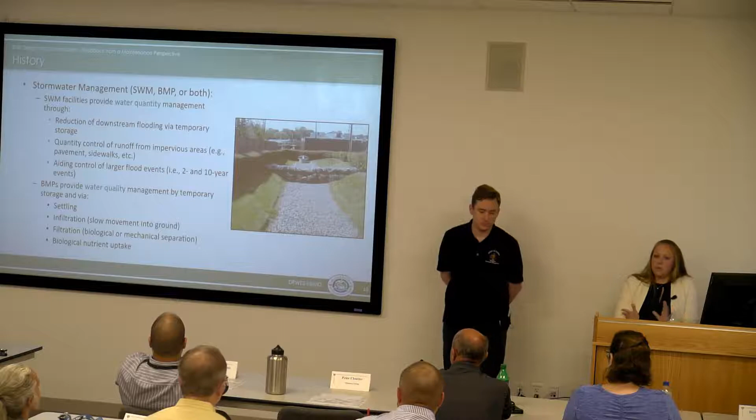And BMPs, obviously, that's the main driver of a lot of designs these days. And part of it has to do with the Chesapeake Bay TMDL. Some of it has to do with local TMDLs. But it's certainly what we see as the primary inventory additions here lately.

But we have dry ponds that are being retrofitted into enhanced facilities. So they're taking peak shavers and they're slapping a BMP plate on it. They're adding some maintenance features to it and calling that an enhanced pond.

And then, as I said, we at Maintenance and Stormwater manage the collection, conveyance, and management aspects of the storm drainage network. So the top photo is the collection point, and then the conveyance is the channels and open channels and pipes. That is a section of maintenance that is performed by another branch within our group, and so we do not, from our floor, maintain any of those types of structures.

That's all done by our infrastructure branch within maintenance, and Malik actually used to work there. We are strictly management, so we only handle facilities.

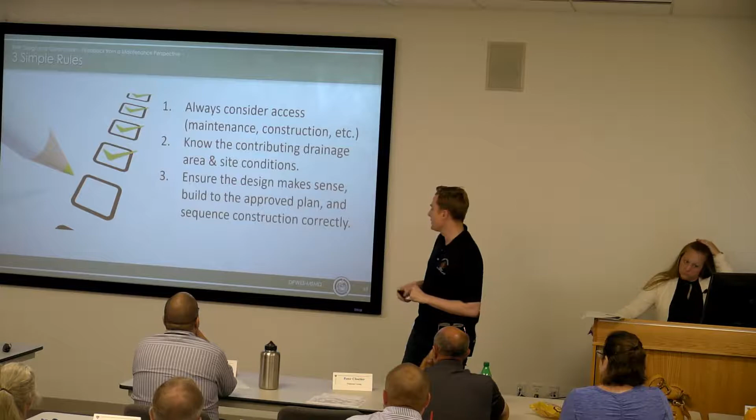And 3, ensure the design makes sense. Easier said than done, I know. Build to the approved plan and sequence construction correctly. So you all are really good. You hit on this. Follow best practice when you're designing this stuff and when you're building it. Make sure you're building as designed.

And if you're not sure if the design is correct or is going to function correctly, don't be afraid of getting third-party reviews. Even consider sending it to a maintenance crew, especially if you're in Fairfax County and you've got a plan set that you're trying to push through. Let the stormwater maintenance crew take a look at it, and we'll chop it up and dice it up and throw it back to you. Then you have to start all over. I'm just playing. So do your due diligence. Make sure that when you're designing the stuff and building it, that you're building it to spec.

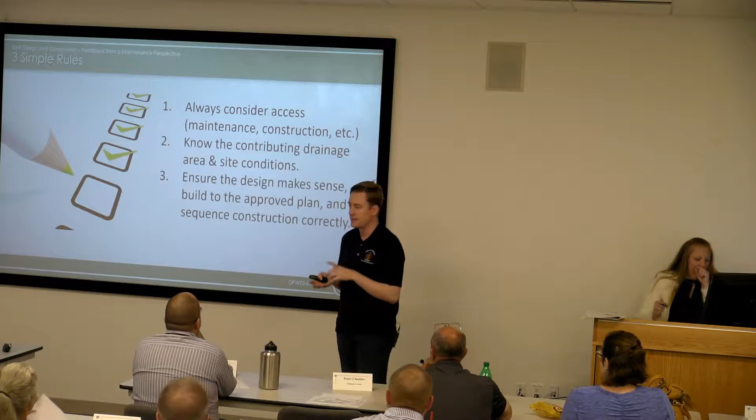No surprises here. I know a lot of you all could teach this class, and you'd probably come up with these same conclusions. Just 3 simple takeaways. Try and keep them in mind at all times when you're doing this stuff, and we'll hit on this slide again just so we don't forget. So the rest of the presentation is going to focus on a few of those facilities we talked about, the specific maintenance requirements, things to keep in mind beyond or in addition to these 3.

And then we're going to go on like a little shop of horrors, or airing our dirty laundry, if you will, about some facilities in Fairfax County that had persistent maintenance issues that might have been resolved by following one of these 3 rules. Again, if you're a Fairfax County manager or you're in the private industry and you were part of these projects, I'm not here to rag on you. I'm just using these examples to let you keep them in mind moving forward, because each one of these BMPs is an opportunity to learn.

So common facility types. Let's hit the types first that we're going to focus on, and then we'll go through the specific dirty laundry, if you will. So the first one that we'll talk about, and we'll get into a case study, is the cistern. These are not widely applied in the county. We are starting to see them more. As John mentioned, we were just in Milwaukee for the Green Infrastructure Leadership Exchange, and Milwaukee is covered in cisterns. It was quite remarkable considering the weather.

But these are the various types that you might see in the county. Rain barrels are the ones that come to mind, but they're typically not sized accordingly. But you've got gravity feed, you've got pump systems, and then the one in the middle is the one that we'll talk about a little bit later in our case studies, which is the George Marshall High School cistern.

But the basic function of these is that they collect typically your rooftop drainage. They can also collect some concentrated flow, but it's typically from the roofs, and you want to just reuse it on the property. And so the one we'll talk about today has an advanced filtration system. So I think it's called a VS5000, something really fancy.

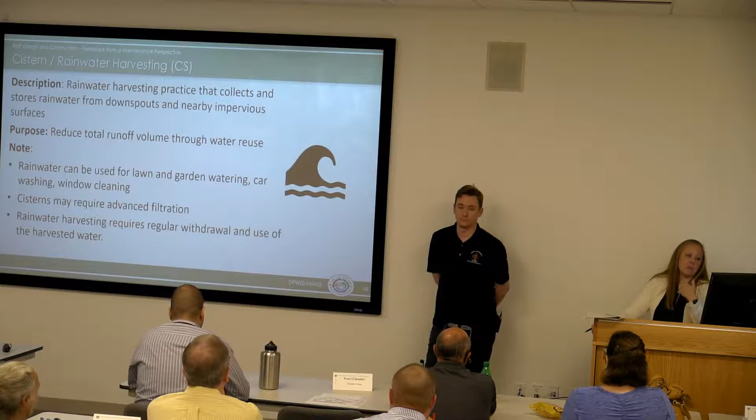And in order for these things to actually work, they actually have to be used. And so the biggest problem we see when we visit these sites is that they're full, always. And there's no irrigation plan, there's no plan to actually draw out the water and make room for new storms. And so, kind of defeats the purpose.

A question regarding the filtering. Is this rainwater that's being filtered? Yeah. For use in watering a lawn? Irrigating a ball field. Why? If it's just falling from the sky, what are you cleaning? Because it'd just be falling on the field anyhow. I think the thought was of bacteria.

Trust me, this thing is still not operational, and I think it came online in 2012. But yeah, that's a good question. So we scratched our heads as well. So there's a pre-treatment upstream. There's a vortex hydrodynamic separator. We'll get into it, but yeah. I mean, I guess I can get it if it's hydrocarbons, collecting runoff from a parking lot or something like that, I could see it make a difference, but yeah.

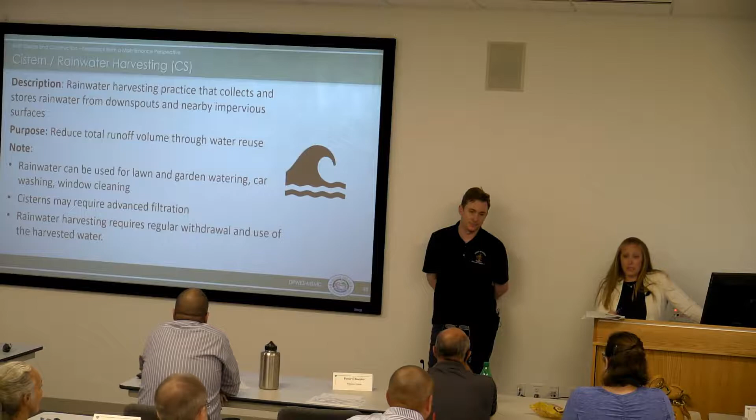Hopefully folks aren't just randomly asking for these things. Yeah. Stormwater planning is not in the group. Okay. You said that was a health department request. According to the folks over in planning, that was a request made by the health department. So that probably doesn't get applied to all facilities, just ones for a public facility like that on a school ground. Potentially. I think it did have a lot to do with the location of the facility, it being with children, but I don't know the details on why. Okay. We just live with it.

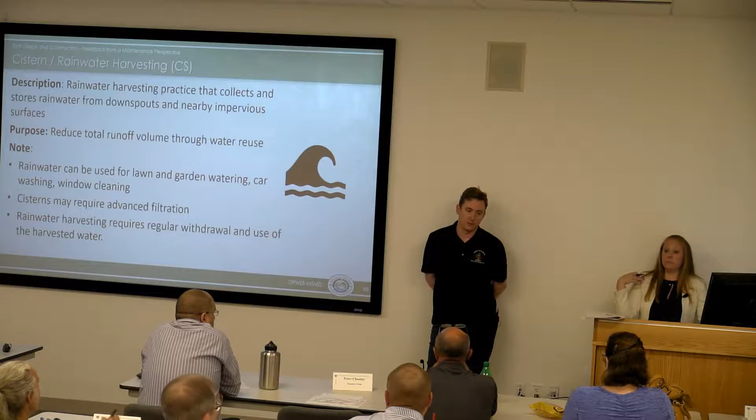So that's a good question to ask yourself when you're designing, like why? Yeah. Sounds expensive. They're thinking kids are gonna be drinking the hose water. I don't even know the half of the expense.

It also has to do with how it's re-irrigated, recirculated. If it's through percolation underground, then it's not as much of a concern. But like Carly said, the bacteria, if it sprays, they're making it airborne. So that's one of the reasons they wouldn't want it to be filled with all sorts of biological stuff.

All right. So again, we're the maintenance workers. So sometimes we're not consulted on design, if you can imagine that. A lot of times, most of the time. And if anyone has sent me a design recently and I was consulted on it, you probably saw me scratch off the installation of these types of facilities. So sorry if that's the case.

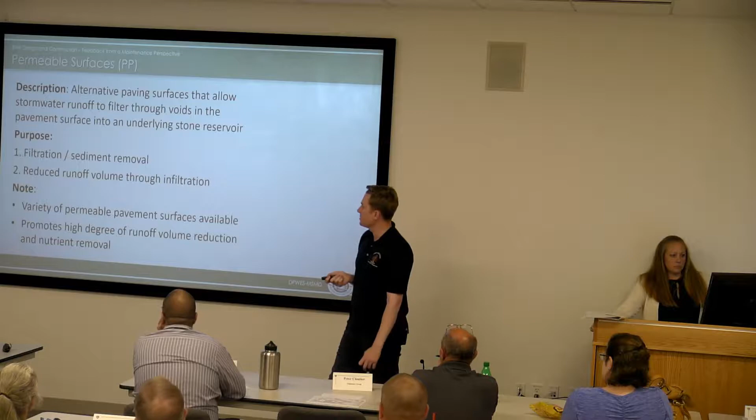And so we have one particular site that is in the travel way where the children are going to get on and off of a bus. And so you think they're going to heavily salt those, heavily plow that, and then you have constant loading over and over and over. So keeping those things in mind is crucial. But this is a really good example of a good site location. I just wanted to throw that out there. Yep. Fire lanes or something, like a fire lane.

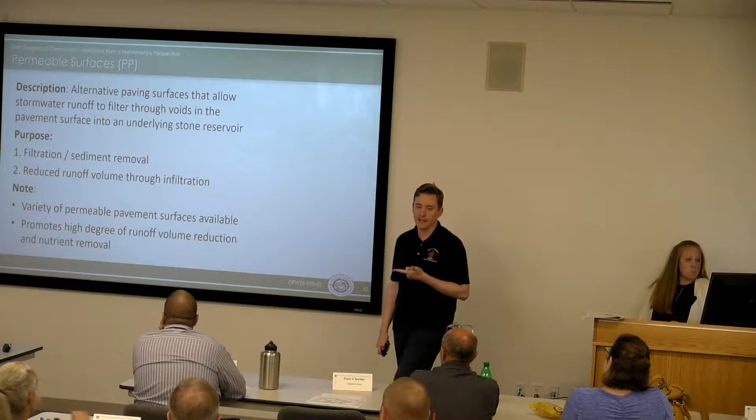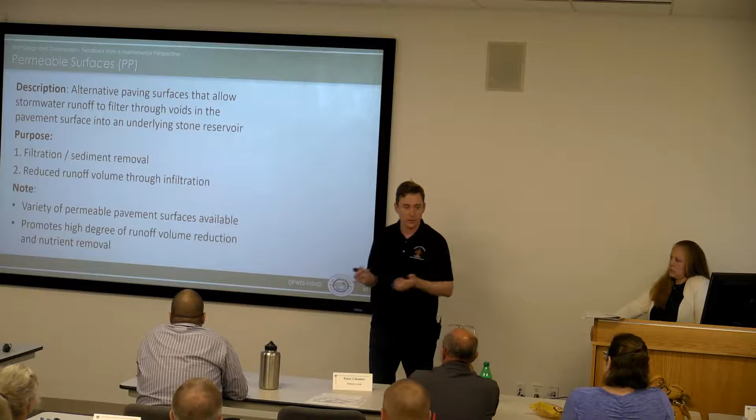Yeah, something that, if it kind of didn't get plowed, it might be okay. Yep, absolutely. So we talked about our three things: access and design are two big ones for this, because you can install these as intended in places that have been spec'd before, or where they've been installed before. But what we're finding overall is, if they're not designed correctly, if the concrete or asphalt isn't cured correctly or at the right temperature, all it takes is a small variation to cause failure.

And as part of dealing with these facilities from a maintenance perspective, we have often sought help from other agencies to do studies on them to figure out what's going wrong with these facilities, what the main maintenance issues are, because at any given time we may be sending out maintenance workers to handle 100 of these facilities, and if the majority of them are failing, we want to know why.

So that's how many we have in the county, but we did involve Northern Virginia Soil and Water Conservation District in a study recently of permeable surfaces. We sent them to 60 of our facilities. We have 100 now; 60 is how many there were at the time, so you can see how quickly we're gaining these facilities. And they assessed them for functionality and proper design, construction, what have you. And the findings were not good.

Their basic conclusion was that these are not a low maintenance BMP, that they are expensive and they are finicky. They're often cited as a simple solution to install, but let me tell you, from a maintenance perspective, that is not true. At least not in this area. Maybe in coastal areas, areas that don't have snow, that might be the case, but that is not what we found in this area. It's not what was found in Philadelphia, and they're studying it now in New York. I suspect that might be the case as well.

The main issue that Northern Virginia Soil and Water Conservation District, it's a mouthful, found was that there was not an established infiltration rate. So these things were designed, but no initial testing of the baseline infiltration rate occurred. So some of them could have failed immediately after design. That's something that needs to be incorporated into this process. Think about, are these things actually functioning? Before you walk away from a facility, make sure what you've put in the ground actually works.

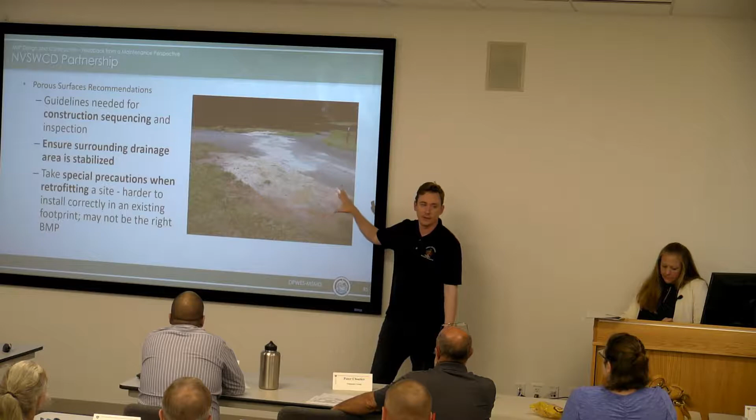So as a result, and based on the findings of the study, we're doing more routine infiltration testing, at least once a year, twice this year, and more frequent maintenance to try and determine, for these facilities that have clogged, if we can turn them around. So the recommendations from the study, we hit on this with the public safety headquarters: sequencing is crucial, making sure there's no run-on occurring that's going to clog those pore spaces. You want to time these things at the end of construction and avoid any heavy construction equipment driving on these or any debris stockpiling on site.

Yes? So I imagine Arlington's having the same issues. Have you guys communicated with them about how they deal with it? I've communicated with Arlington about the issues that we're facing, and keeping an open line of communication about our findings. I deal primarily with the residential infills. Oh, right. So we give no credit for porous surfaces. You can build it, you get no credit. But I've heard that it's widely promoted in Arlington as a solution for residential infills. Yeah, based on what I've seen with our public facilities, maintenance is expensive and frequently needed. So I'll leave it at that. I can't speak for Arlington or what they've experienced.

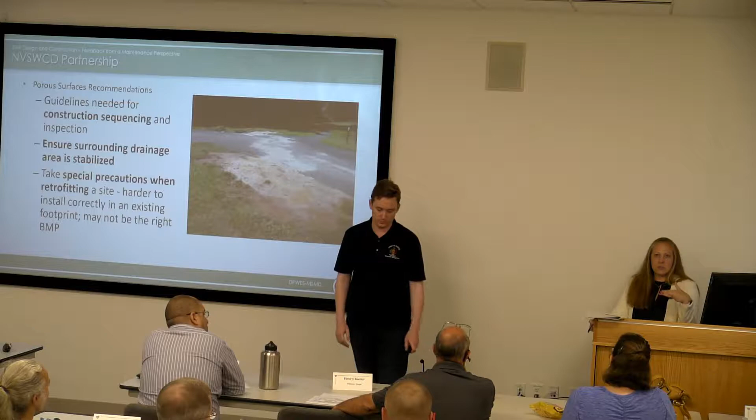So just real quick, we do not allow porous surfaces on residential properties to be input into a long-term BMP. What we're finding, especially under an INF plan type, is that subdivision plans are sneaking in that have maybe 4 homes on it, and they're putting any type of facility they want on those plans. So we just got one, what are those little driveways? Pipe stem, yes, it was a pipe stem type development, and each of the driveways off the pipe stem were porous asphalt.

And we try with infills especially to go out and inspect those within 1 year of the bond release so that we don't have too much turnover with the property owner and they don't complain that we waited 5 years to visit them for the first time. So we try to get to them really quickly. And the very first inspection within 1 year of bond release, they did their 5-gallon bucket test and it just rolled right off. So they all got their driveway sealed. Yeah, they've already gotten their driveway sealed. So that is a tremendous impact. And they have no idea what they've done. No clue.

So we're working through that, but it's just not a good idea. You've got to think about the person on the other end and in perpetuity. That means forever. That's a gigantic expense this whole community, parcel by parcel, is going to have to fix. So you've got your plan approved with that device, and now what? You have to go back and do something. They're going to have to reinstall it, or go back to land development and go through the whole plan process all over again. Once bond's released, there's no revision. Yeah, it's not ideal. But it's currently approved on a bonded subdivision. No, I think it reduces the C factor. They don't allow it for, well, no, do they? They do, but I think it's.

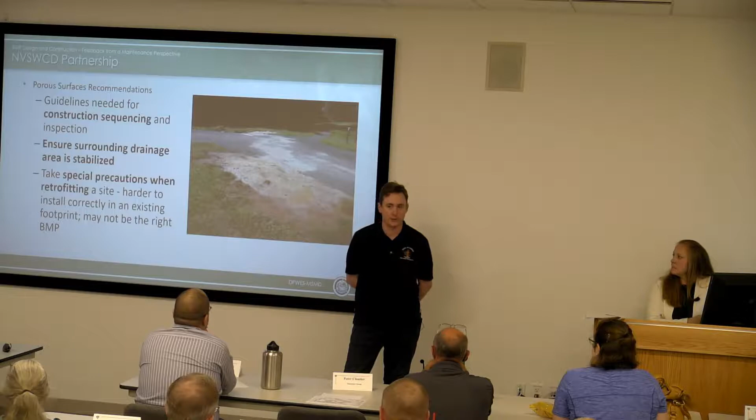And even with all the maintenance that we're doing on them, a lot of them we still can't restore appropriate infiltration. So I can't imagine what a homeowner would be doing who might see it as a passive facility that doesn't need routine maintenance. So we're going to keep going, but these are all good points. Feel free as we keep going through to shout out and give us pointers too, because it's supposed to be a two-way conversation here.

Some other findings from the study, and again, we touched on this before: sequencing is crucial in construction because you'll have run-on. And if you're retrofitting a site, installing these is not always as easy as slapping down new concrete or new asphalt. If you use the prefabricated stuff, getting the sub-base just right so it's level is very tricky. It's been tough.

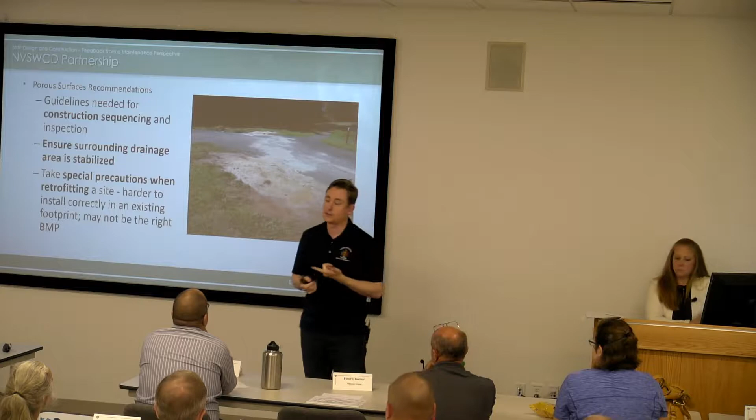A lot of times if you think you can just go in and re-pour asphalt or concrete, it may not be the right solution, because that window of properly spec'd asphalt and concrete is very narrow when you consider that it has to be cured correctly, the weather has to be right, you have to make sure your construction group is not compacting the sub-base, all that stuff. For all these reasons, we're very hesitant about moving forward with this type of facility.

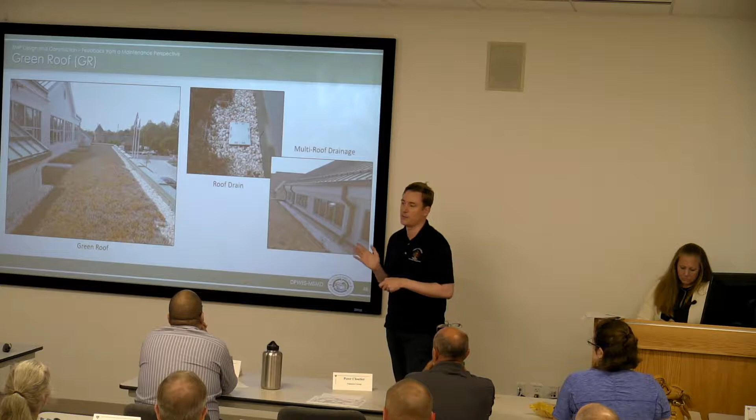With green roofs, we've had a lot of success. I think the main issue with green roofs comes down to access, as you saw, and not just access that makes sense for folks to physically get out, but safe access. I'm not going to spend a lot of time on what green roofs do. You all are familiar with these facilities, right?

So again, this is an extreme example, but make sure that there's a clear line of communication. This might be something you need to talk to your contact in the county about if you're in a private agency, or if you're in the public agency, or in Fairfax County, talk to who it is you're doing this work for and ensure that folks are going to be able to get to and out of this facility safely and easily.

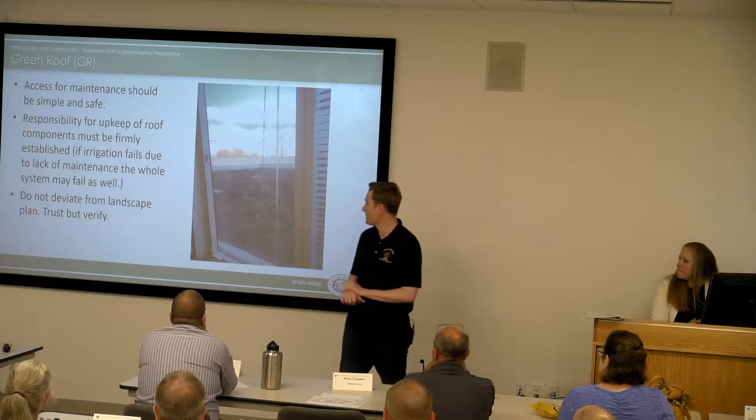Other things to think about: we talked about our 3 points. One of them is build to spec, but also plant to spec. So you've got your landscape plan, follow it. We hire those folks to do those designs for us for a reason. There's not too many plants that can survive these types of conditions in Virginia, this drought and then flooding and then drought and flooding. We see that in all of our facilities.

But make sure you're following the landscape plan. So have construction admin on site, or maybe have an ecologist or plant person on site who can confirm that what's going in the ground is correct. They don't need to be there the whole time, just maybe as the plants arrive on site, make sure the plants are looking good and that they're actually going in the facility.

Out of curiosity, who are you directing that comment to? Like the designers? No one's going to pay us to sit out there and watch that. Yeah. We pay our engineers to go and be construction admin for our projects. So it's becoming more and more popular, and we're seeing that happening. But we've also worked with LDS.

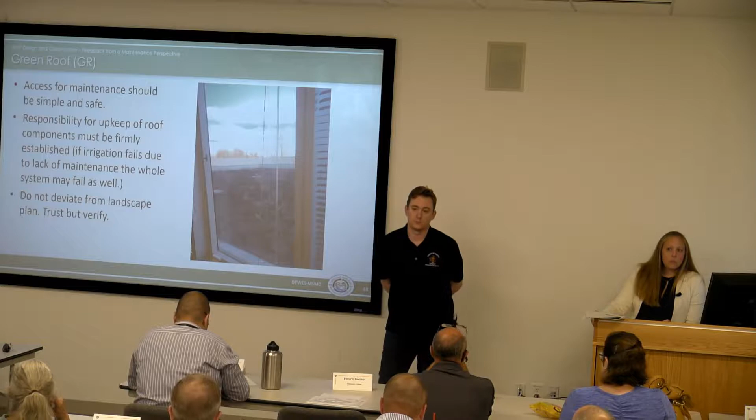John Matusik led the effort from the land development side to create the third-party certification checklist, and that's a requirement. That a lot of times is not. They hire some firm that'll just do it. Oh, you're saying for the third party? Yeah, right. But for internal projects, stormwater planning, and ourselves at maintenance and stormwater, we hire our engineer that did the design to also do construction oversight.

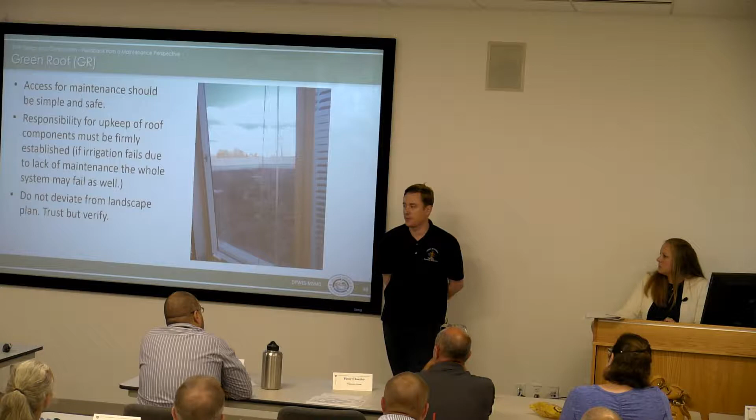So raise your hand if you've ever done construction oversight. A few of you, yeah. We find it to be very valuable. If you need to tap the abilities of your landscape architect in-house or subcontract, it doesn't take a lot of time for them to go out there and just confirm that what's being installed is the correct plant. Because if you have a mass die-off on one of these roofs, it's going to require a lot of additional work to get it reestablished again.

Same rule applies for irrigation. This might go beyond the whole stormwater side of things, but think about how this facility is going to be maintained and watered throughout the life of the facility, and if that piping is installed correctly, if it's part of your responsibility, or if the building manager applies the plumbing code. There's a lot to think about there, and we've had instances where that plumbing has failed in the past. So I can't point to specific solutions, but definitely keep it in mind when you're doing the design and review for these facilities, if it has an irrigation system built in.

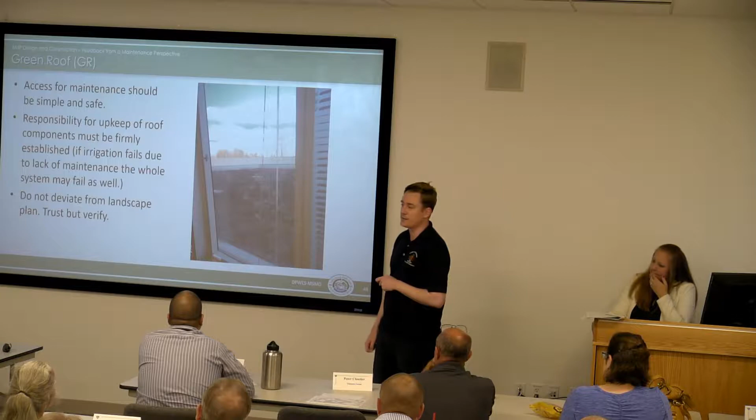But really, the biggest one is access. Make sure that folks can get out in these areas safely, and also that they can get back in the building safely. This building has auto lock on some of these doors because it's a very secured facility. So we've had a lot of our maintenance workers or inspectors stuck out on the roof, having to make a phone call to get inside.

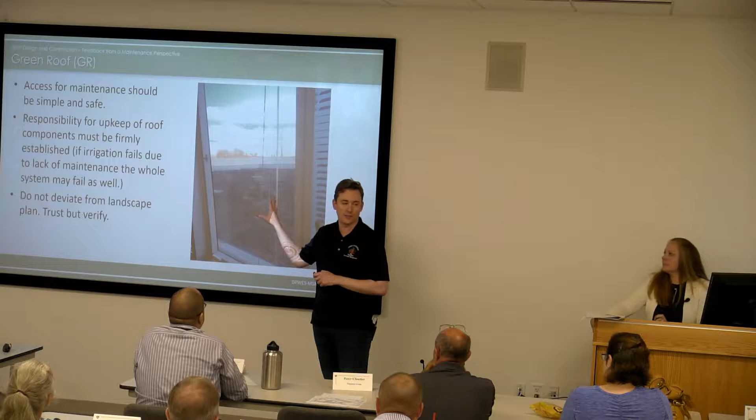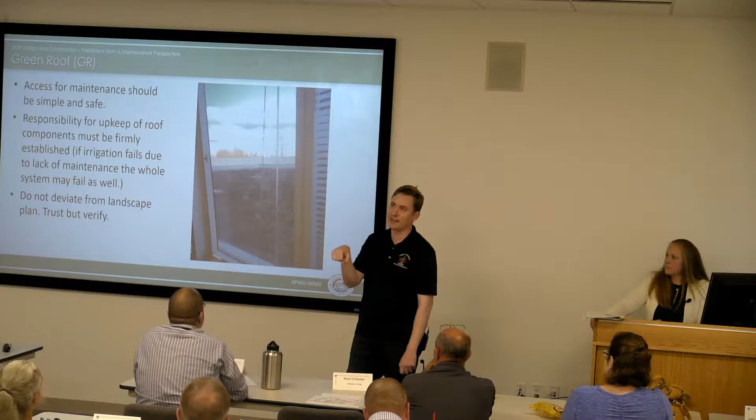Same applies with our permeable pavers. Try not to install pavers in a secured area, because we've had people locked in behind police stations and government centers because the person at the front desk fell asleep or wasn't paying attention, and they were stuck back there with a vac truck sitting at the gate waiting and billing their time, I imagine. So keep that in mind.

Bioretentions, again, you know what these are. Water quality and quantity control. A few things to keep in mind with these. We've already covered some of the major ones, but we did a study with Northern Virginia Soil and Water Conservation District. I'm going to mess that up every time. We studied 130 of these bioretentions, so they went out in the field and performed infiltration tests and inspections on these facilities, just like they did with our permeable pavers.

We were coming up with problems with maintenance. The designs seemed funky for some of them. Some of them just seemed improperly installed and not according to plan. And the main finding was indeed that construction oversight, similar to the green roofs, is necessary when you're putting these together. Not necessarily for plants, but just for appropriate design. Because what they found was the issues largely come down to the construction and how they were installed.

67% didn't have the proper depth. 32 didn't have the right surface area. 59 didn't have the right media soil depth. 55% didn't meet the suggested infiltration rates. So you spec these to be the appropriate size and have the appropriate volume to handle runoff from a given area. But if they're not installed correctly, when it comes time to handling that runoff, they're going to fail.

Sometimes they'll fill up with water, there's continuous flow. Sometimes the plants will die because the conditions aren't exactly right, which gets into another thing. Plant maintenance for these facilities is crucial. Making sure you have someone, again, a landscape architect who can spec the correct plants for these types of facilities and making sure those plants are installed in them and not something else. Don't get too creative with these. Sometimes the simplest solution is the best.

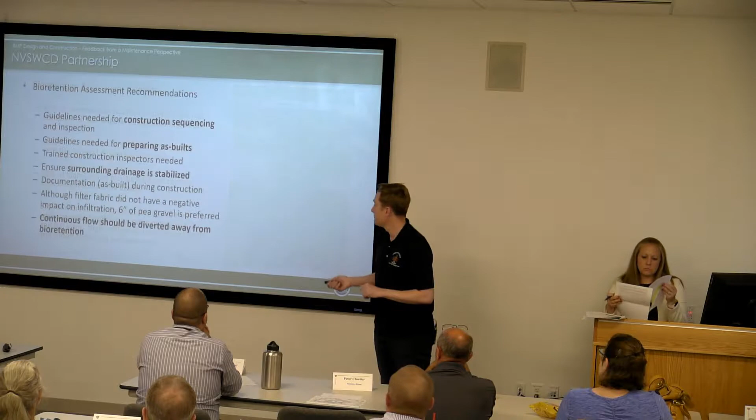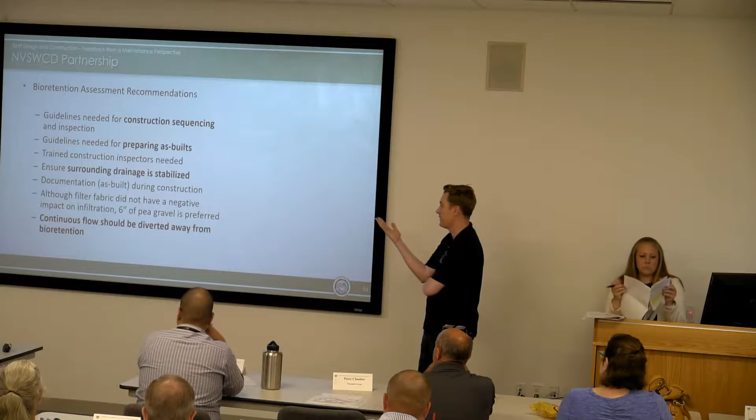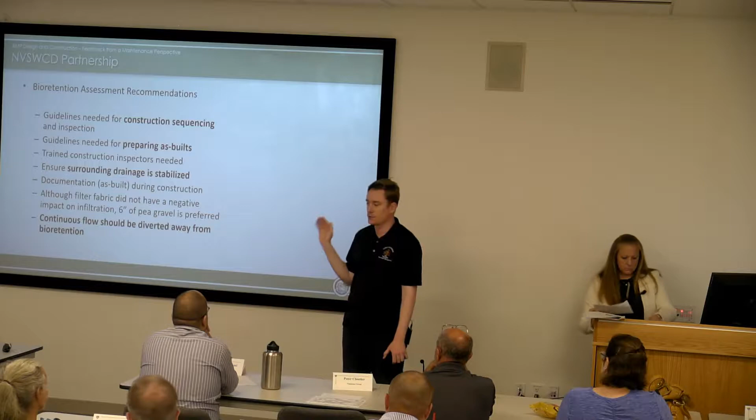So again, construction sequence is crucial. Let's talk about one of our main 3 points. They also found that preparing as-builts was necessary. There was a dearth in available as-builts when they were reviewing these facilities. Making sure your surrounding drainage is stabilized, and making sure that, this is important, continuous flow is not being diverted to these facilities. And we had examples of this where continuous flow, and we'll show one of them, was diverted to a bioretention. I'm sure you can imagine the results were not great. They're there to handle incidental flow from rainfall, not a sump pump in a basement of a parking garage.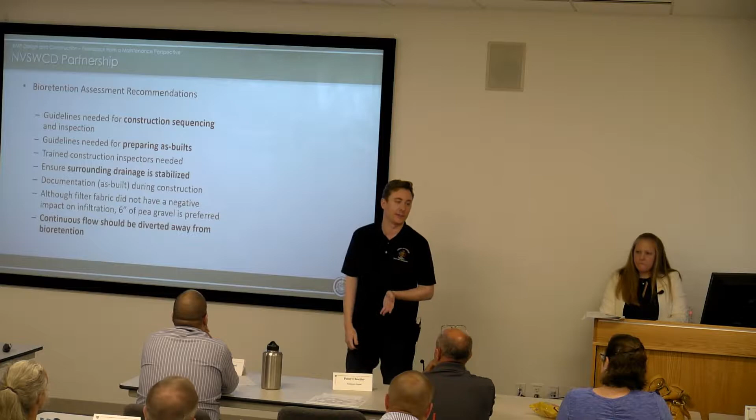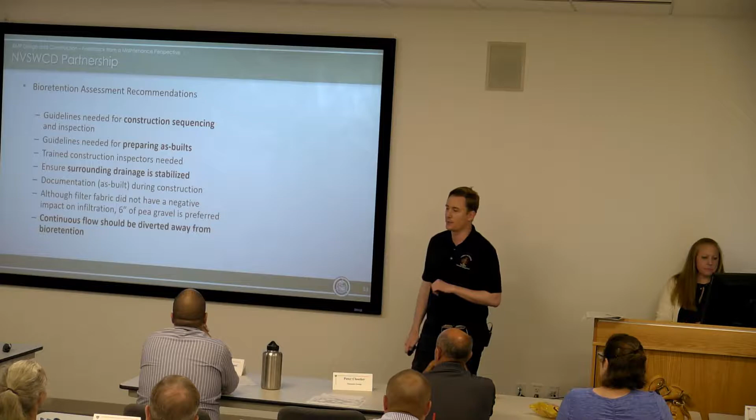Some other recommendations: make sure that you're verifying your particle size and your biomedia in situ. So make sure it's spec'd correctly based on the regs, and also when it's installed, make sure it's actually the right stuff that's in the ground. I know this is all kind of preaching to the choir here, but it is critical because from a maintenance perspective, if the things aren't put in the ground correctly, we're not going to be able to maintain them to spec.

And then I hit on this earlier, but plantings, I think the main takeaway here is don't try and reinvent the wheel with these. There's basically 2 different types of bioretentions that we sort of spec out. There's what we call the high maintenance bioretention planting plans, and then what you consider a low maintenance bioretention planting plan. Those names are not true. They're all kind of high maintenance, but you have your naturalized design, and then you have what is considered a row design, 5 individual sets of plants easily separated. That would be the high maintenance design because you have your plants separated out into individual rows so that when you have folks coming out here to weed them that aren't familiar with plants, they can identify pretty easily if something is growing in there that shouldn't be.

If you are designing a facility and you don't anticipate it having a lot of maintenance or a lot of attention, go with a naturalized design, where it looks kind of just like a big amalgamation of different species, but try and keep that number of species small, typically 5 or 6. And I can give you an idea of some of the species that work for those situations, but what you want to get away from is getting these too complex, because when it comes time for maintenance, we're going to send folks out there who don't know all these different species. They're not going to know a weed necessarily from something that was installed intentionally, and if they're all mixed together like that, they might have some issues sorting things out. So keep it simple for sure.

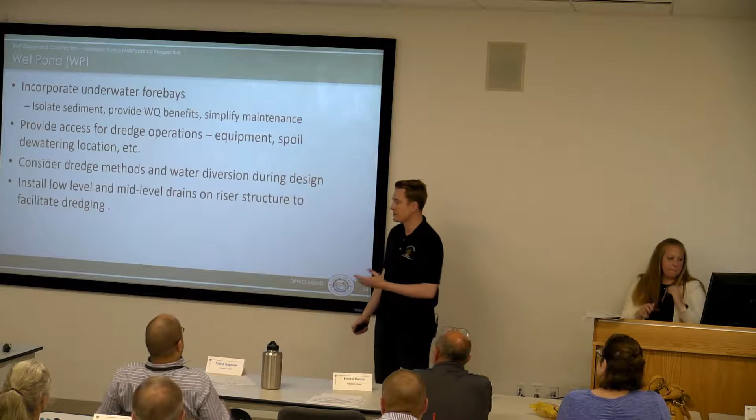Make sure that if you are designing a wet pond, that you are considering maintenance in that design. So remember, these things need to be dredged just like dry ponds. And some of the older designs do not incorporate underwater forebays, which is crucial because it kind of isolates and contains that sediment for a certain amount of time, which makes the eventual dredging a lot easier.

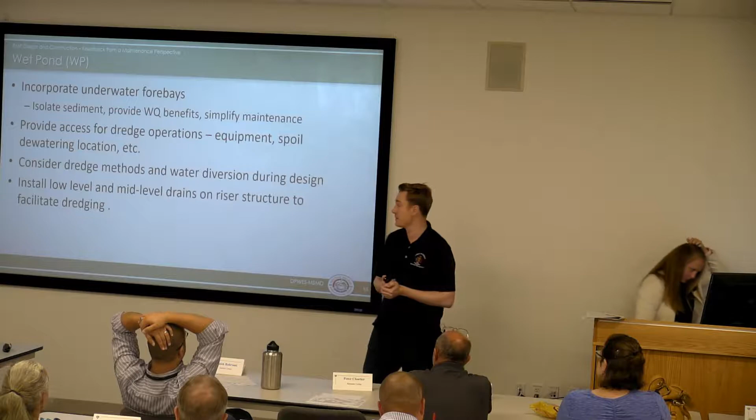But you need to couple that forebay with low and mid-level drawdowns. So basically on your control structure, make sure you spec a way to draw that pond down to the height of the area that would need to be dredged, say the forebay, without having to drain the entire pond.

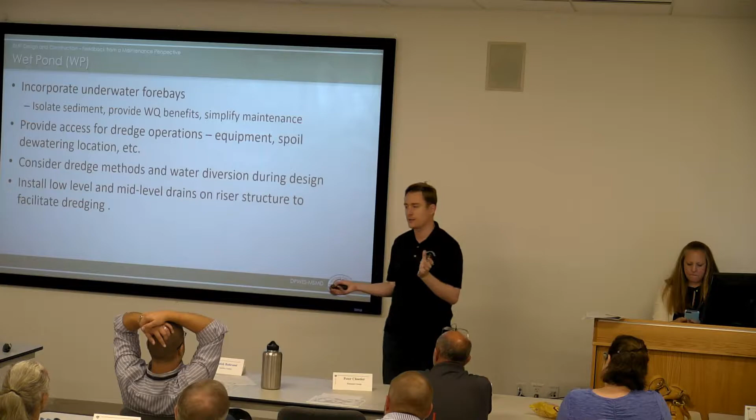So has anyone been present in any of the projects we've done in Fairfax County where we've drained some of our major ponds, removed the sediment from them in the last 5 years? So you've seen some of them. One of the big issues with doing that is all of the nice wildlife that has accumulated in that pond and grown in that pond, the fish, amphibians, reptiles.

You drain that whole pond down, you have a nightmare on your hands because you can go in there and shock those fish up. You can catch those fish and try and move those turtles, but you're going to miss a majority of them just because of the nature of the beast, no pun intended. So make sure you have a way, if possible, to draw those ponds down to the forebay level and be able to scoop that sediment out without having to basically clear out the whole pond.

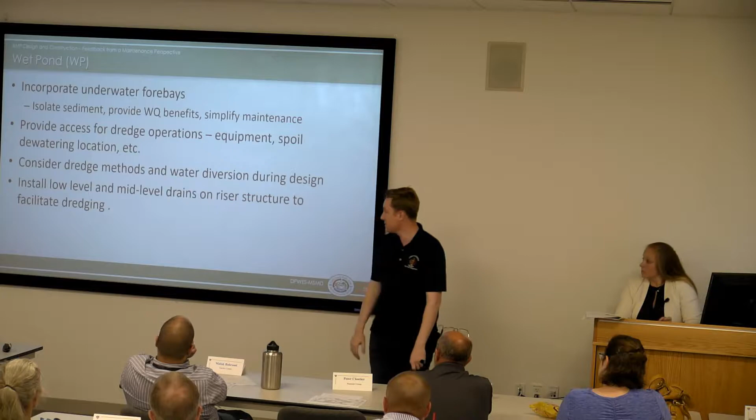As such, also please consider that these dredging operations have maintenance equipment that's part of it. So typically it's cheaper to do a mechanical dredge. So as such, you'll need an access road to each of those forebays and major structures that will need to be maintained as part of that effort. Pretty common sense stuff, but you'd be surprised by the number of ponds and designs we see that don't have access for heavy equipment to the major pond structures.

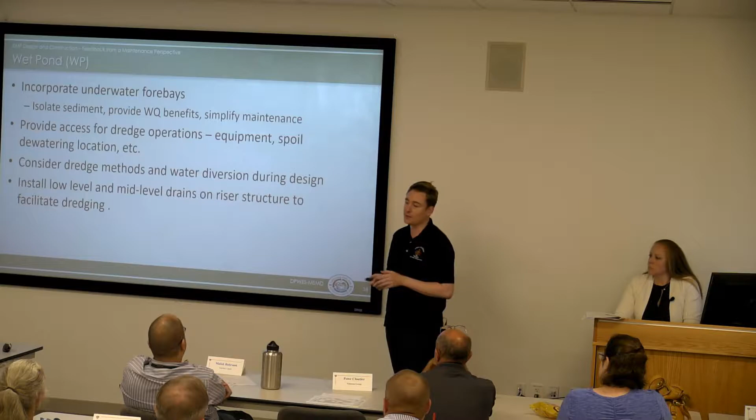A lot of the newer ones that are coming in do include those, but it's something that I frequently have to spec on plan sets. Like, hey, we're going to need to get into this forebay eventually. Maybe not in the next 5 years, maybe not in the next 10 years, but we're going to need to get a way to get there. And the same applies mostly for dry ponds as well.

Coming from an ecological background, I would sure feel a lot better if we could come in through an access road than through a marsh or meadow with our excavator when we're coming to dig these things out. So we've seen geogrid access roads, we've seen just pavement access roads, compacted 57 stone access roads. All those are fine depending on the size of the pond, but just please keep in mind that we're going to need to get in there at some point and clear the thing out.

but when you get topsoil installed and you get your plants installed and you get different pieces of equipment moving in and out of that facility as part of the design and construction process, you're going to wind up with low spots throughout the site. It's just not going to work. So make sure you have significant slope that is going to allow proper drainage.

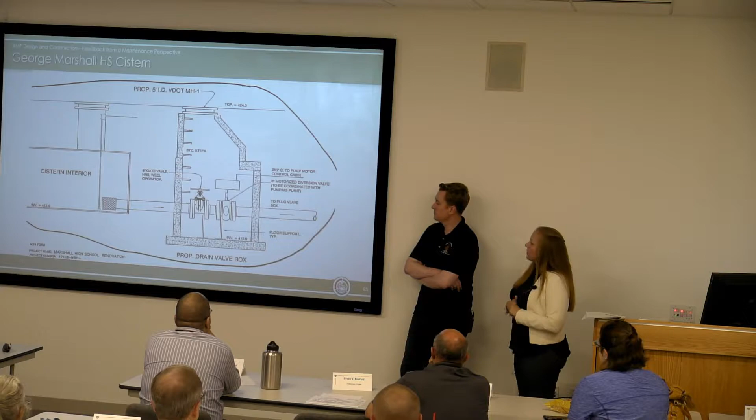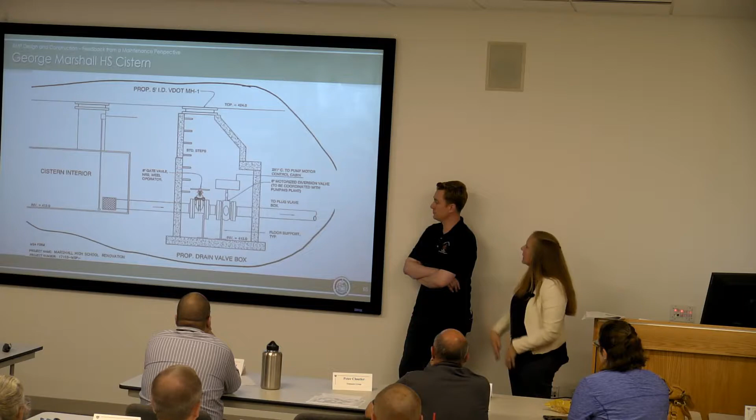In the dump valve, we had a pressure transducer to monitor levels, and it just kept flooding and flooding. We couldn't figure out what was going on, and we finally got our hands on some construction photos. Sure enough, the whole entire facility was backfilled with 57 stone, so we're just sucking the water right to it. The construction specs didn't say to do that; it should have been backfilled with regular soil. That's been a real problem for us, and that's not going to get fixed. So now we have to waterproof the interior portion of the structure.

You can see that the pipe goes in, and there's a dump valve here. We'll open that up in the wintertime to let the water just pass through, and then it moves into the actual irrigation portion. So when we were told, here you go, this is yours, we were like, oh, wow, okay. There was no cellular connectivity. There was nothing that would allow the irrigation system to work. So there were a lot of oversights.

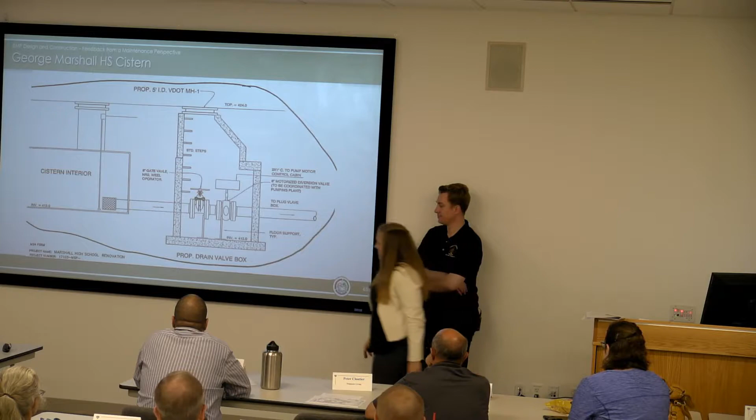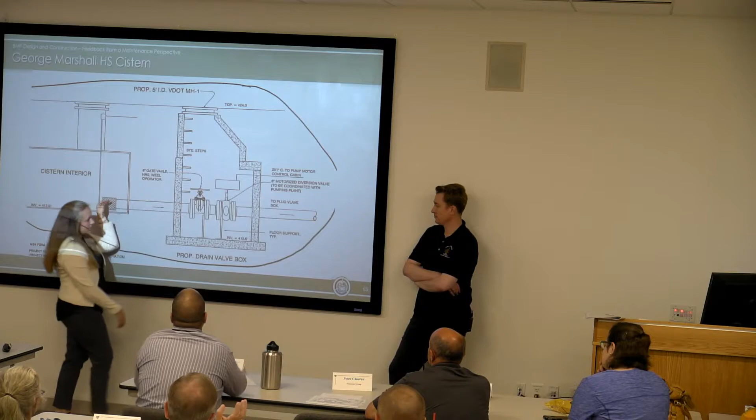There was no trash rack protecting the orifice, so you can imagine all the tennis balls within this system. That trash rack was just never put in. This is where we were supposed to have access and be able to monitor levels. None of that happened. Tennis balls all throughout here. Water bottles were very common throughout this system when we took it over. We've retrofitted that and gotten the trash rack installed, but we still can't access it from directly above. So that's a real problem for us.

Like I said, the dump valve floods continuously, so we're trying to figure out, should we do grout injection to fix the exterior portion, or we need to have somebody come in and waterproof the inside. We haven't found a vendor that'll do this yet, so in the current state, it just still gets water intrusion. And then it moves into the actual pumping system itself.

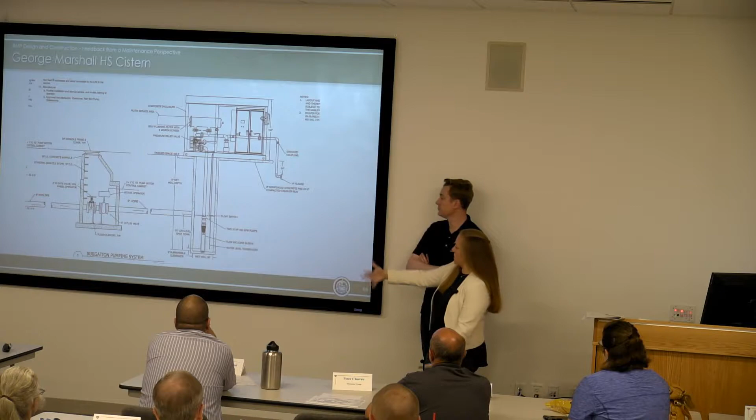I think it's about, it's 15 feet. I was going to say 15, this is 14. It's about 14 feet deep, and this is the crux of our issue, to be honest with you. So the pictures will say a lot more, but essentially what happens is the pump just draws the water from the well. It comes up, it gets treated through.

This is like this big micron filter here, and then there's another UV filtration system, and then there's all the brains of the system. And there's 2 different softwares that we have to pay for. We have to get cellular out there, so it's very complex. And none of that was done prior to giving it to us.

So we went through, and in 2014 we came up with an MOU, or 2018 actually, we just got to sign an MOU with what the schools were going to do, because actually all the athletic directors in Fairfax County operate irrigation systems. So that's a weird fact, but we have to deal with different athletic directors at different schools when it comes to stormwater on the site. So that's kind of the gist of this, but you'll see there was no consideration ever of maintenance.

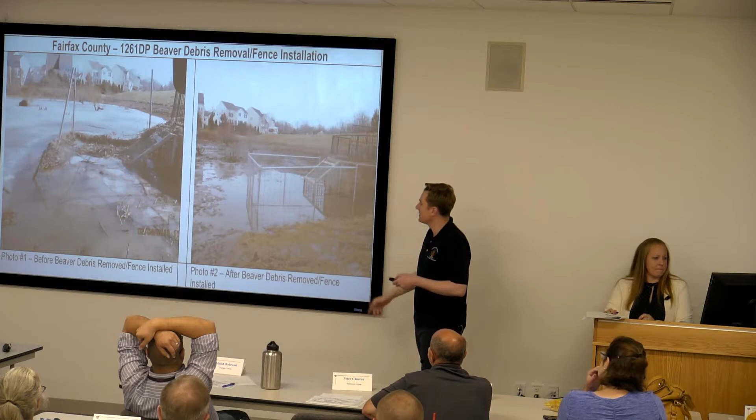Yeah. Here's other examples of our beaver deceivers, and you can see these are also, I presume, inline dry ponds. They're not great. They don't last forever, and they're subject to all the same debris and junk that goes downstream that will clog the trash rack. So just don't do it. Just don't build them inline. Make it wet. Here's another one. Just cut to the chase.

Yep. Okay, another inline dry pond. This is a pond that has an over 200-acre watershed, and it's a dry pond. So some of the same problems we see at Leland Pond, the last one we're seeing here. But we also have a whole new host of problems, which I'm going to show you. So remember how I talked about all the organic material, all the debris, all that junk goes down to the trash rack here that the stream carries it to.

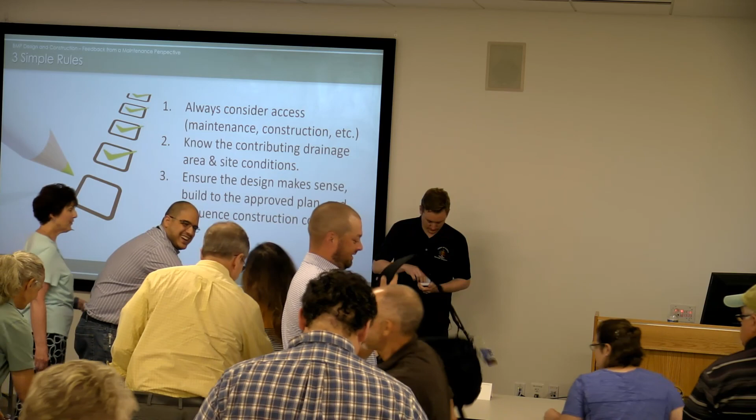Thank you. Good luck with traffic. Sorry. Yeah. I think he told us what we needed to know a couple times. Nice meeting you. Yeah, nice meeting you. Have a good day. Well, I see Gupta, and I hear that name all the time on WMAL. Interesting to hear. Yeah, I will send a reminder email tomorrow morning. Oh, okay. Because I did my job because I'm supposed to do this. Yeah.